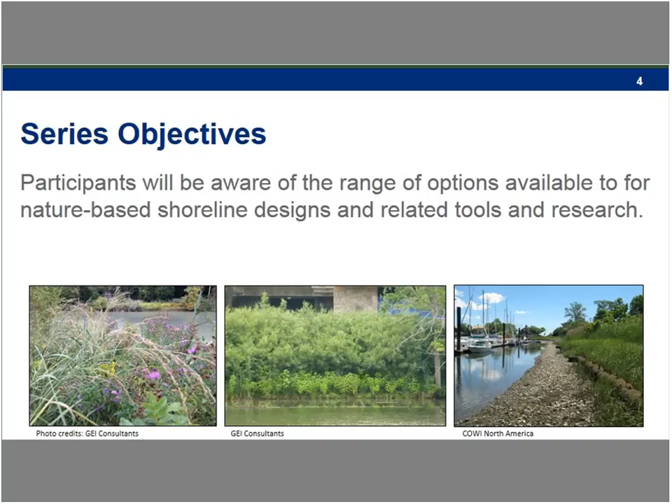So I just want to talk a bit about the series objectives. We just want to make sure that our participants are aware of the range of options available for nature-based shoreline designs, related tools, and research.

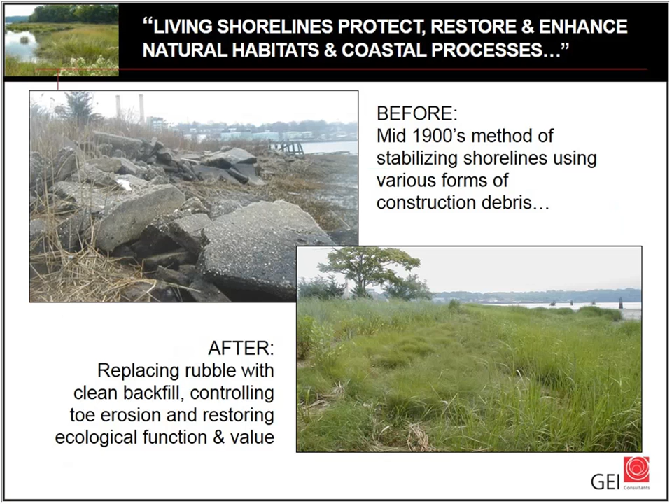As an introduction, I just wanted to share this slide that presents a living shoreline that was constructed over 10 years ago in Hempstead Harbor on the northwestern end of Long Island. Living shorelines are quite different from historic means of filling swamps and stabilizing shorelines with whatever construction debris was readily available. Essential to living shorelines is habitat protection and enhancement in a manner that still allows coastal processes to continue.

Living shorelines are inherently flexible and sustainable by nature. Well-functioning systems will widen the transition zone between open water and upland, blurring the distinct boundaries imposed by historic fill placement or development.

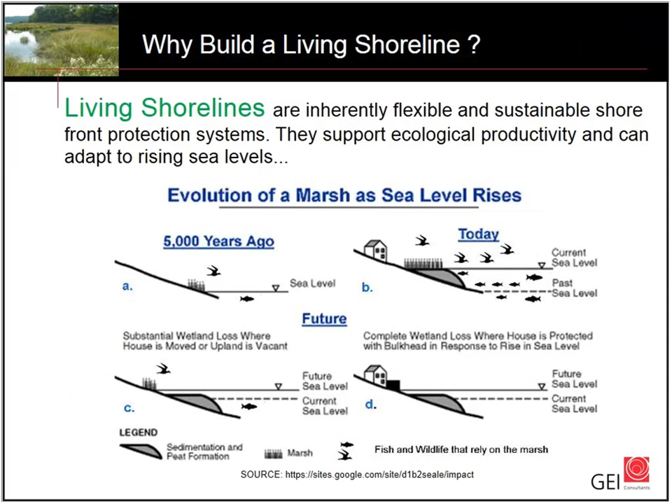Living shorelines are dynamic, complex systems that require careful planning and proper site characterization. In order to withstand the rigors of time, battering winds, wave run-up, and extreme tidal fluctuations, a collaborative design approach embracing many disciplines is highly recommended.

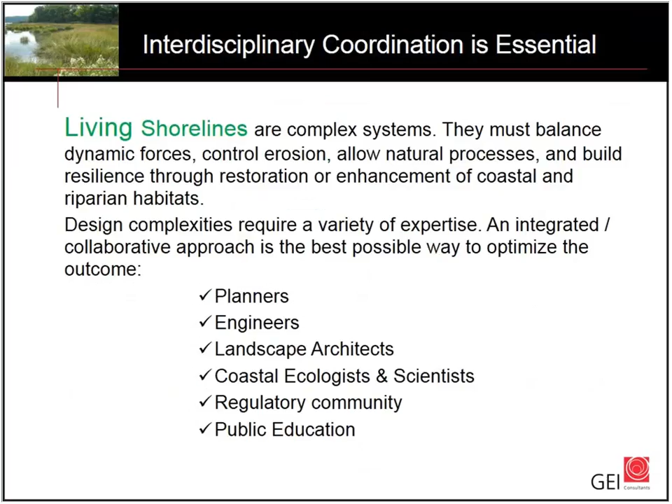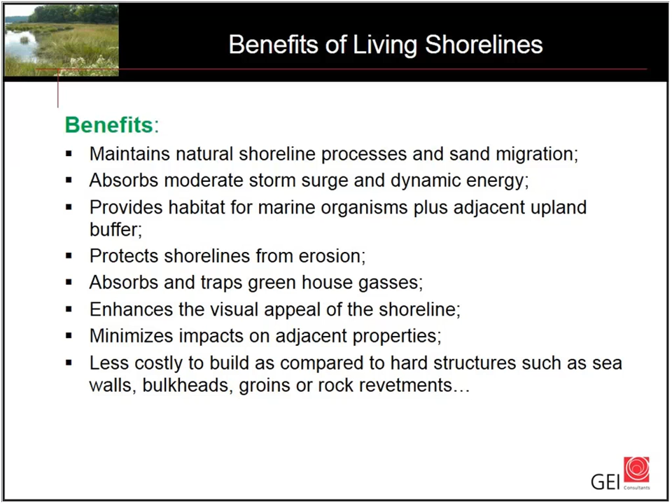There are numerous benefits that can be derived from living shorelines, some of them obvious, some of them less intuitive. A very appealing benefit is their cost effectiveness and ease of installation. Mind you, living shorelines are not systems that can be built and forgotten or walked away from. They require long-term care and monitoring, just like you would with any living organism.

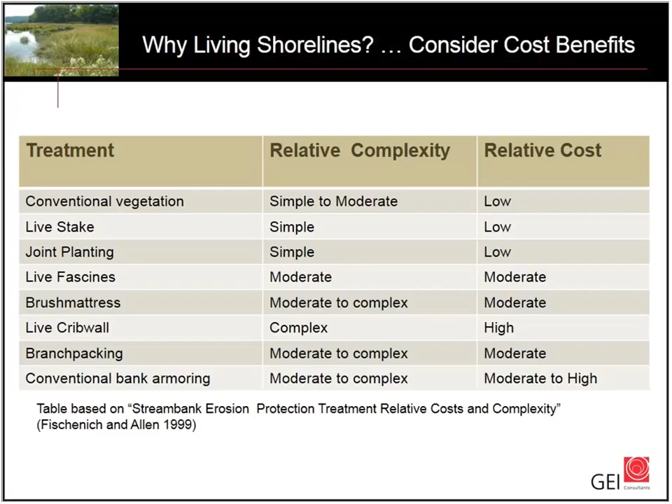What I presented here, I don't have exact dollar figures to share because those will vary across the region based on the availability of components. But I can share with you the fact that raw material costs are much more affordable than what you typically find associated with structural alternatives such as timber or steel bulkheads or concrete seawalls.

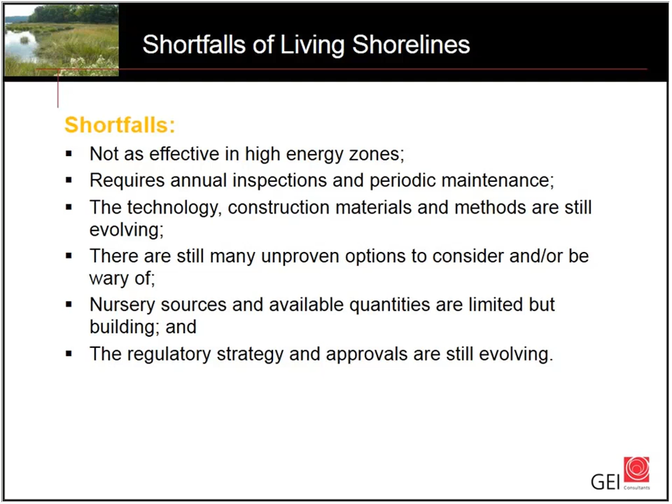I also would like to warn you, besides the benefits of living shorelines, there are some shortfalls. Living shorelines are not a panacea for every eroding shorefront area. They're best suited for low to medium energy shorelines, and we'll be discussing that in a little while. Through years of trials and errors, I've selected very basic fundamental design considerations, which I'll go through in the following series of slides.

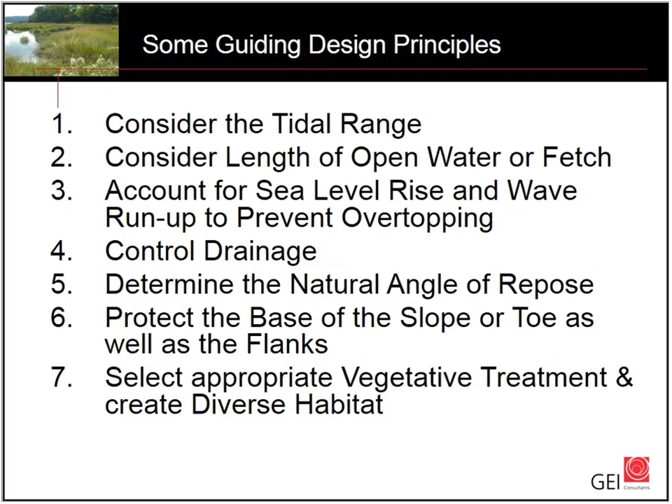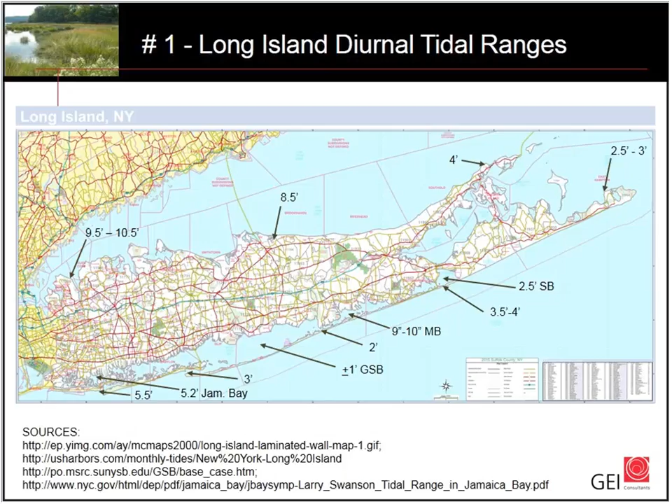First and foremost, location, location, location. It's the first critical piece of information you need to consider in design. Tidal ranges vary greatly across Long Island, from 9 to 10 feet on the western portion to 2 to 3 feet along the eastern portion of Long Island. And within the South Shore estuaries and bays, the fluctuations are moderated. These ranges are very important because they dictate the type and width of coastal planting zones you're going to be designing.

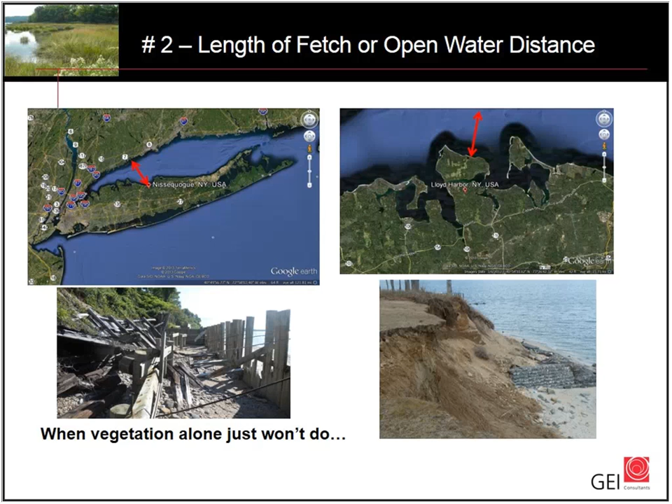Second piece of critical information is the distance of uninterrupted water, or fetch. More exposed headlands are subject to higher wind and wave energies than irregular coves and smaller embayments. You can see in the lower photographs what happened even for structural measures that were not properly protected for some high energy storm events.

I'm going to be using a number of terms. I just want to introduce them. That leads us to this analysis. Low energy sites are characterized by 1 to 2 foot wave heights and reduced storm surges. These are generally good potential sites to install living shorelines. As the wave energy and exposure increases, you could consider hybrid structures, which are better suited for those conditions. On extremely high energy sites, upland retreat or hard structures might be needed to stabilize shorelines that are subject to higher wave energy with waves greater than 5 feet in height.

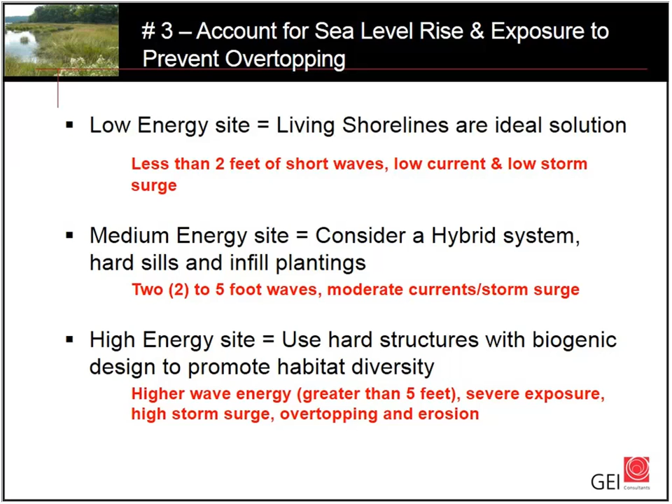Another important consideration is controlling drainage. It's critical to avoid bluff slumps or erosion scarps. With drainage, we're not only talking about intercepting surface runoff. You have to be concerned about intercepting perched water levels that might break out along the face of the bluff or the shoreline and create seepage lines.

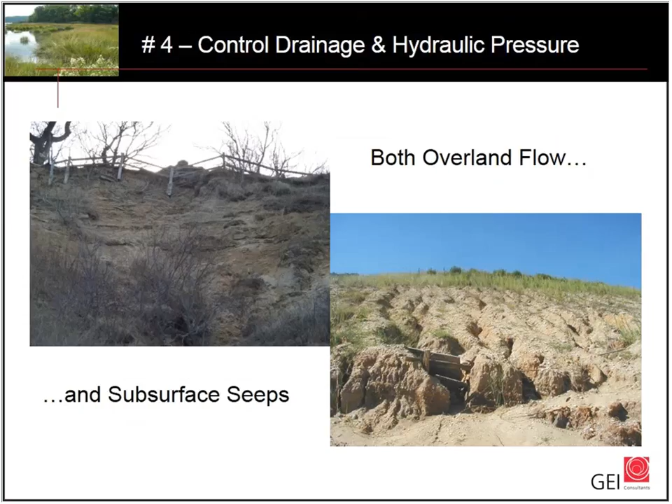Another design consideration that's often overlooked is determining the soil's natural angle of repose. If soils are left too steep, they will never become permanently stabilized with vegetation alone, and they'll require erosion control fabrics or other structural means to increase the shear strength and prevent sloughing.

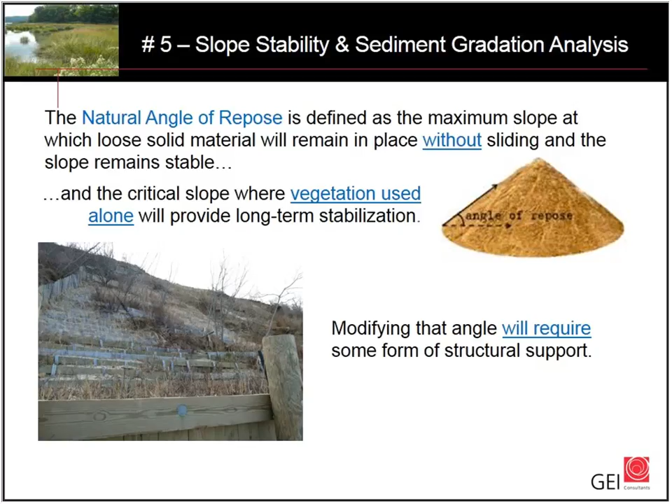Another critical design consideration for slope stability, whether it's bluffs you're dealing with, stream beds, or banks, is protection of the toe, or the base of the slope, as well as the sides of any shoreline protection treatment. Shown here are some good and bad examples of toe protection in more structural types of projects. Toe protection on living shorelines can simply be accomplished by anchoring coir logs or installing vertical batter boards or armor stone.

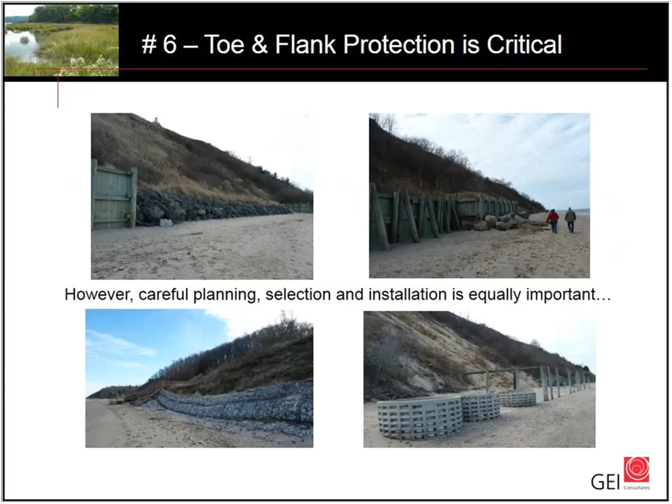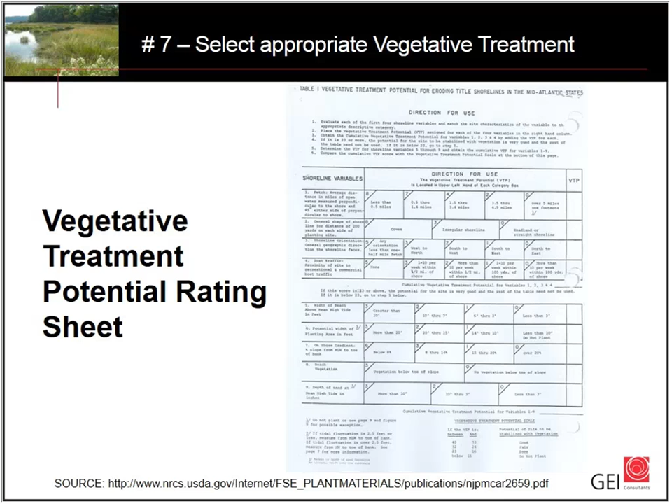Last but not least is the proper selection of appropriate vegetation for treatments. In low-energy sites on flatter gradients, plugs or seeding alone might be used to stabilize a site. On steeper slopes or higher energy sites, deeper-rooted native grasses coupled with shrubs and erosion control blankets might be needed.

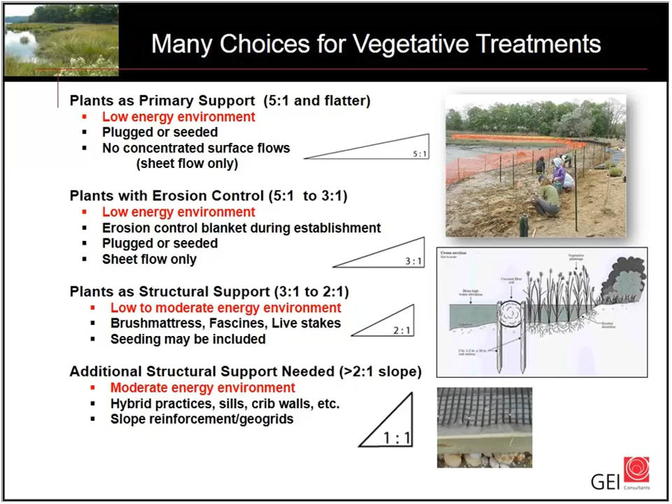Plants themselves can also provide structure when installed as bioengineered slope protection by applying root wads, fascine bundles, and live stakes, creating brush mattresses. These structural supports, the plants themselves, provide structural support until the plants start to sprout and take root into the soil.

Now I'd like to take you on a tour of 3 case studies. 2 are on the north shore of Long Island and 1 is in a south shore embayment. The first study

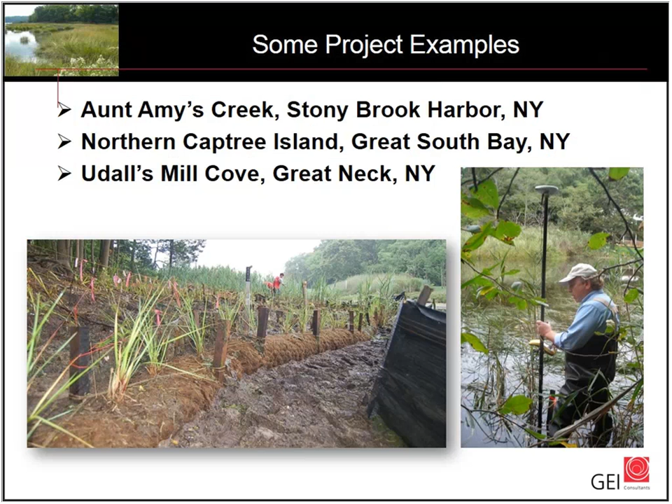is on Aunt Amy's Creek, Stony Brook Harbor. This is midway on Long Island on the North Shore, and this project involved a private residence that was perched on top of an eroding tidal creek.

Site constraints on this project included discharge from a large stormwater outfall, which created flashy stormwater flows. Also difficult was the sliding salinity wedge that would happen every time the tides would come in and out. It's a low energy, low fetch site, but it has a very high tidal range of 7 to 8 feet.

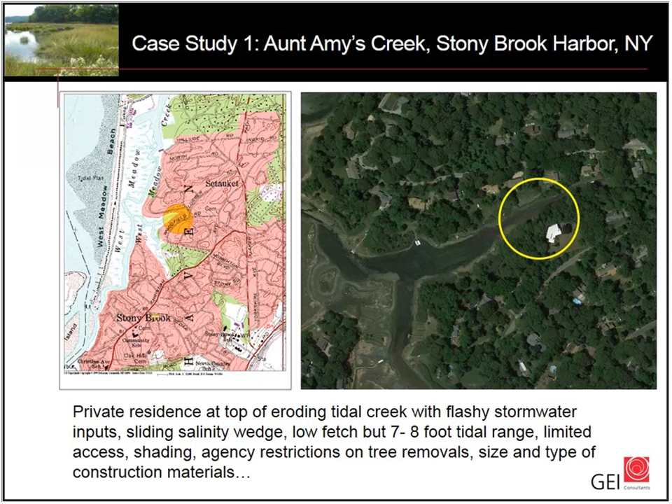At the time of our first inspection, New York State DEC had a moratorium out on bulkheads, which are already present in the creek. And the town also had a prohibition against using armor stone at the base for a revetment. So we were faced with a real quandary on how to meet all the agency restrictions and still come up with a green solution.

This slide shows the site conditions in 2007. The initial eroded condition, the banks are undercut, varying anywhere from 2.5 to 4 feet for the entire distance of the property of 400 feet. On one end of the property, the neighbor also had a floating dock, which was banging up against the toe of the slope.

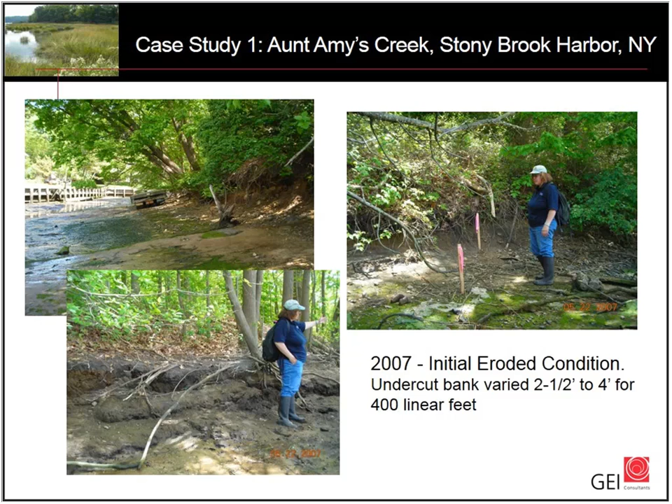Planning began in May of 2007 with our initial site reconnaissance. Following that, a site topographic survey was conducted, and we developed the plans, specifications, and all the permit application materials, which were submitted in November of 2007. Because our living shoreline components in this case were relatively unknown to the regulators and non-conventional practices that engineers were not familiar with, it resulted in a lengthy review period by the agencies.

What we ultimately designed - take a look at the lower left photograph, the lower left graphic. A live crib wall was proposed along the 2 steepest sections of the bank. And the central section, which was less steep, was proposed to be covered by a brush mattress.

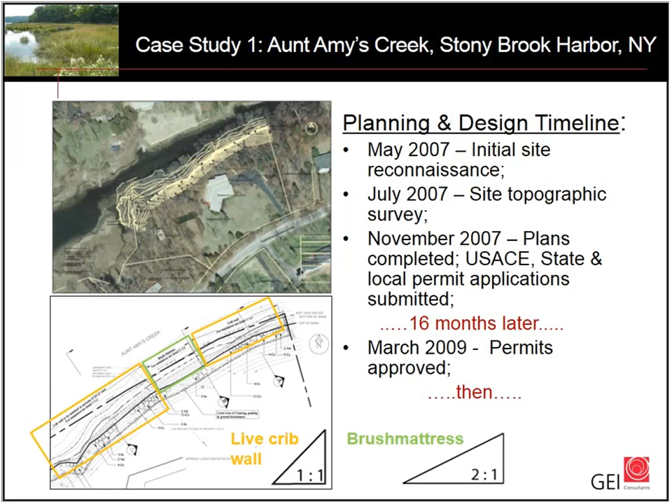Due to the extensive agency review period, the initial erosion scarp of 2 to 4 feet widened and became something larger than 5 feet in width, which exacerbated problems on the site and required additional engineering modifications to be drafted up. Mind you, this was after the permit drawings were already submitted, and as a landscape architect, my design authority only extends to structures with a height of 4 feet. Taller structures require engineering signature and stamps. So we had to pull somebody in to make those modifications to the permit drawings and then get additional approvals from the agencies.

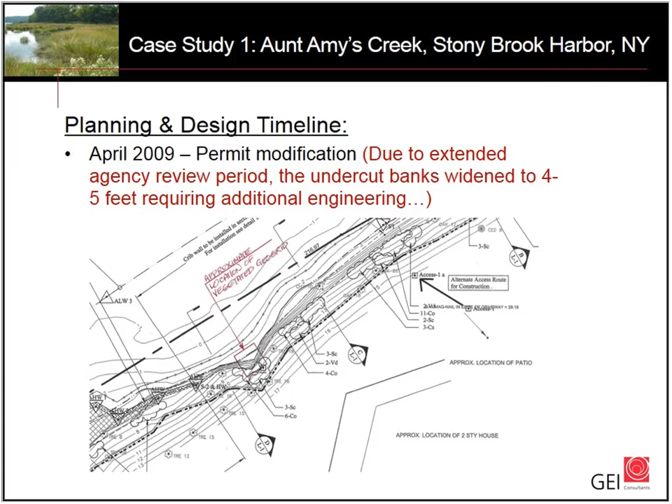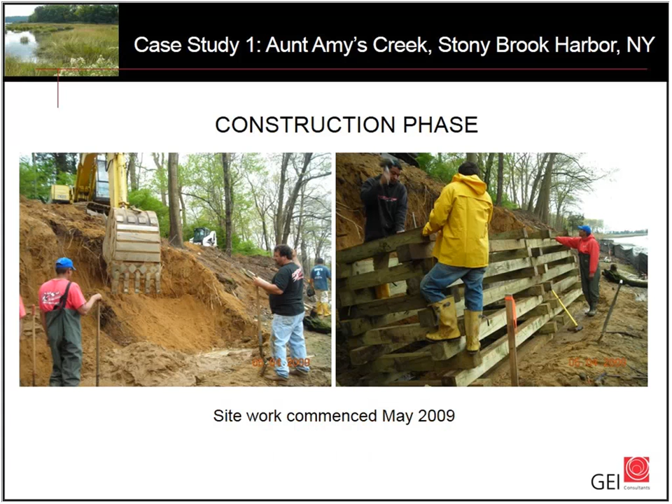Finally, we received the permits and construction began in 2009. These photographs show you the live timber crib wall, which is built basically like Lincoln Logs stacked upon each other with voids in between, and those alternating rungs are interplanted with live stakes and shrubs to hold the fabric together.

During excavation of the live crib wall, we encountered spring seeps that we didn't know about previously, which could threaten the integrity of the slope. Of course, field changes always need to be made, and we included some geogrid tiebacks and raised the stone infill so that the flows could continue through the bottom of the project and reduce hydrostatic pressure.

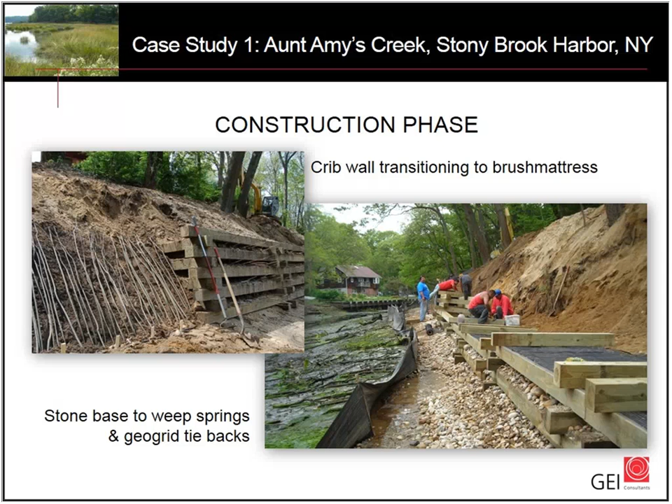As described earlier, the crib wall was installed on the steeper portions of the slope. You can see it recently completed there on the photo to the right, just below where the house sits. On the less steep sections, a brush mattress was installed on the gentle slopes. The upper left shows the cut live stakes that were used to create fascine bundles at the base of the brush mattress, and the live whips that were placed in between the rungs in the crib wall.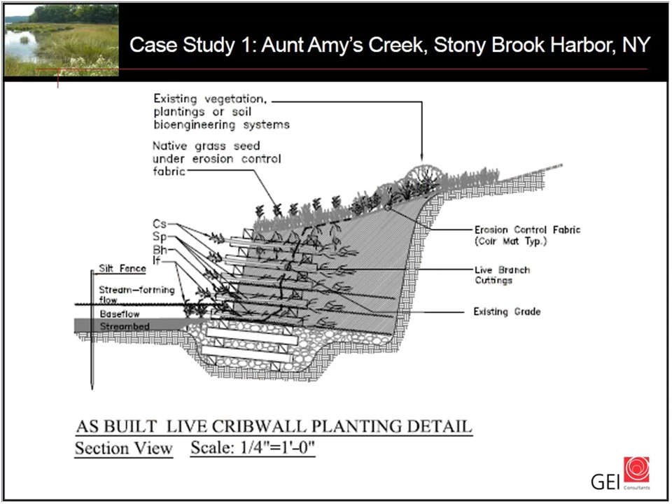What I'd like to mention in this series of slides about the brush mattress is a bioengineering technique that's been applied many times in riverine settings. We had to modify that design so that we could include salt-tolerant shrubs at the base.

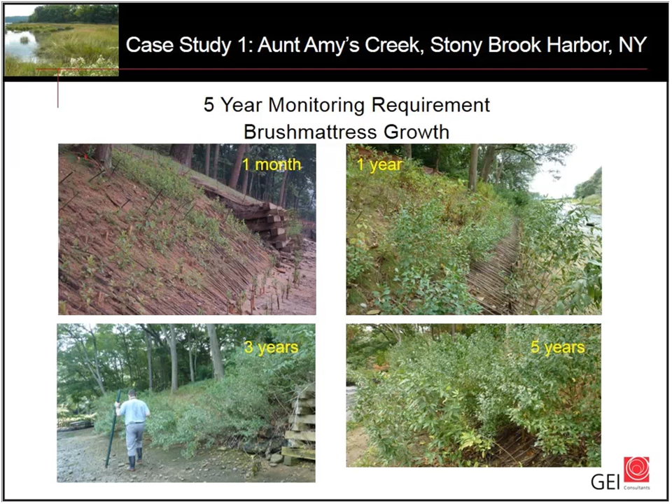The initial approach using willows and dogwoods was great when the plants just started to sprout, but over time, the willows and dogwoods in the lower part of the rungs of the live crib wall and the brush mattress did not hold up, and we had to replace those over time.

This slide also shows the vegetative growth through the crib wall over the 5-year monitoring period. You can see in the 1-year and 3-year photos that the shrubs are very well established, but by 5 years, you're starting to see openings at the bottom of the crib wall.

Those openings were treated afterwards with inserting tubeling shrubs, groundsel bush and marsh elder, that would withstand the salinity wedge that we were experiencing.

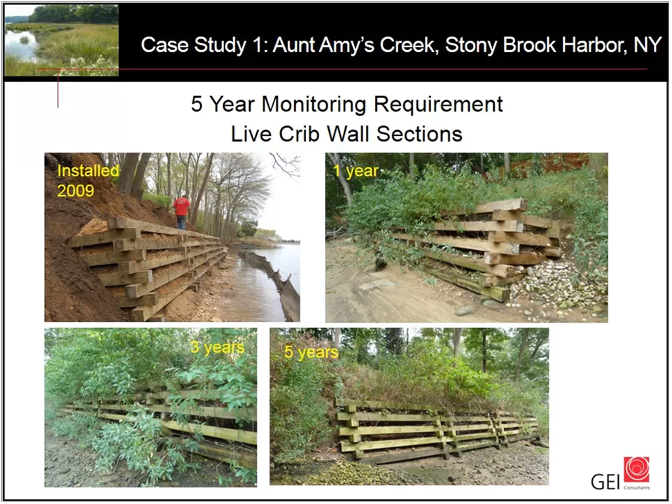I can tell you that there is no nursery supply right now that has salt shrubs on Long Island or anywhere in the Northeast of a size or length that can be used as live stakes. So that is a challenge that we're facing right now, and I've discussed it with plant materials center managers and several nurseries.

So how is this living shoreline holding up? It withstood the forces of Hurricane Sandy and several northeasters, but changes to the channel morphology and rising water levels have caused us to rethink the current needs on the site.

Stone toe protection is finally being considered after 5 years of monitoring as a viable treatment, and has gotten the green light from some of the regulatory agencies.

We're going to try to also implement a pilot coir log and ribbed mussel seeding at the western end of the crib wall where the water levels are deeper.

We're going to switch over now to a South Shore location at northern Captree Island. This is located in Great South Bay. The area is characterized by a 1 to 2 foot tidal range, but what makes things difficult is the 2 to 4 mile fetch that it's exposed to.

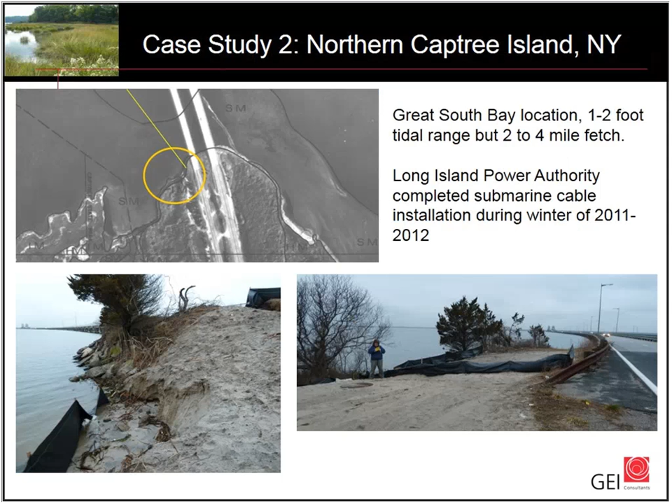The Long Island Power Authority installed a submarine cable across the bay, and we were tasked with designing the restoration on the shorefront where the cable transitioned to Captree Island to join the electrical substation further down the parkway.

Before and after the cable installation, we had to conduct some eelgrass transplanting from the submerged aquatic beds that would have been impacted. And then after the cable was in place, the area was replanted with eelgrass plugs.

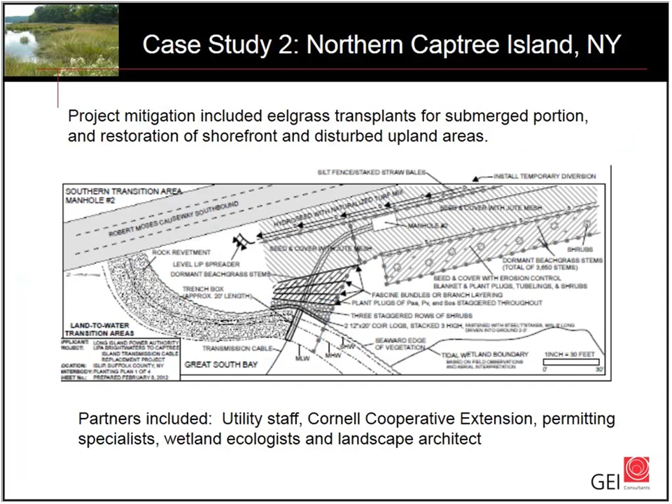The partners on this project included the utility staff, Cornell Cooperative Extension, who assisted with the submerged aquatic vegetation, permitting specialists, wetland ecologists, and a landscape architect, which underscores the need to have an interdisciplinary approach to come up with viable solutions.

Depicted here is the upland transition onto Captree Island. Constraints at the site included working within the confines of the utility's general permit.

Toe protection was limited by the depth of the buried cable, and we couldn't place any materials below mean high water based on the permit conditions.

What we wound up doing is stacking or terracing coir logs, installing plug plantings, native seeding, placed jute, and plugged dormant beach grass through that jute.

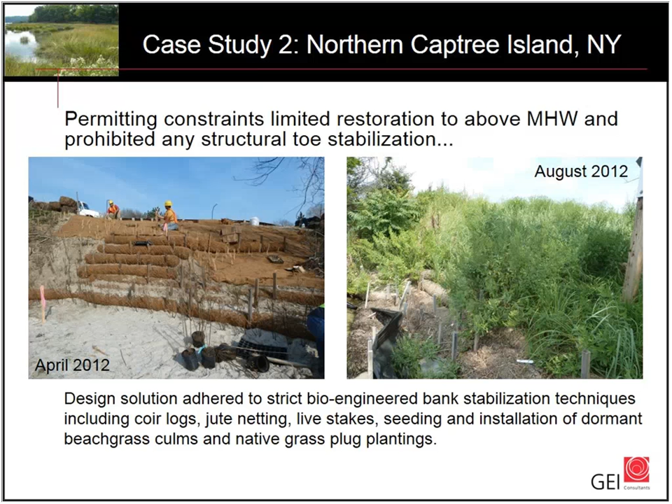Within very short time, you see in the photograph to the right, from April into August, we had very good early vegetative success. The native grasses and dormant beach grass plugs established well. Shrubs at the toe of the slope are thriving and protecting the base.

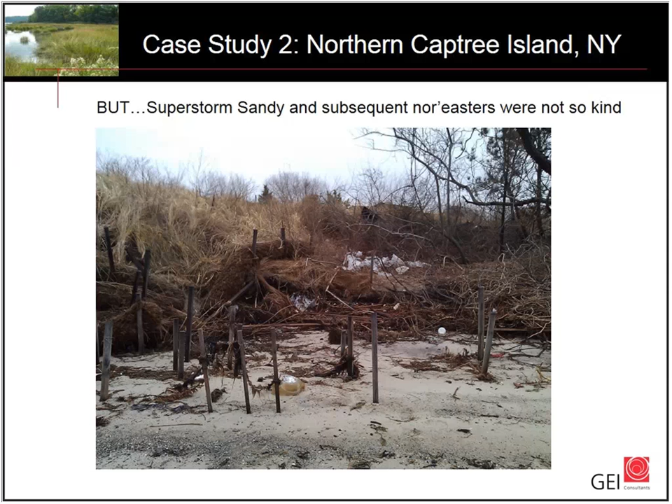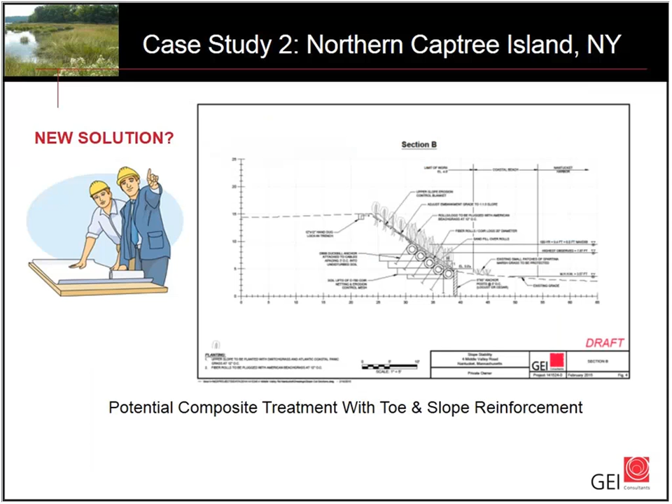What do we do now? A new solution? Possibly add more reinforcement to the stacked coir logs, tying them down using duckbill anchors and cable, and that might prevent the undermining that was seen in the previous photo.

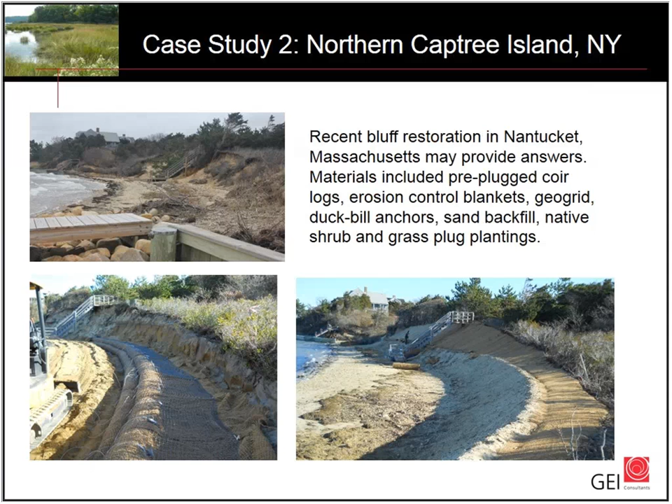That type of protection has already been installed up in Massachusetts. This tiered approach incorporating the anchors, geogrid, and native plantings appears to be doing very well, and we'll wait to see how that continues to flourish.

And the last case study is a North Shore Long Island site at Udall's Mill Pond. It's a tidally influenced coastal pond managed by Nassau County Department of Public Works.

The challenges on this project included a sliding salinity gradient, the fact that the pond is surrounded by an urbanized watershed with high sediment deliveries, and invasive species were prevalent.

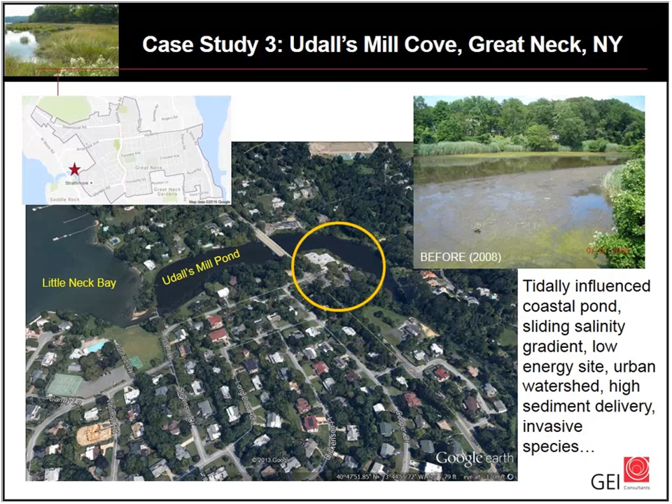Our charge was to remove the invasive species, replace them with natives, restore the habitat, and do what we can to improve water quality. In this low-energy environment, a lot can be done with plants alone.

We were able to establish a brush mattress along the bank, shown in the upper left. We replaced the common reed, the bittersweet, and black locust saplings with a mixture of buttonbush, elderberry, beach plum, bayberry, pasture rose, and native grasses and wildflowers.

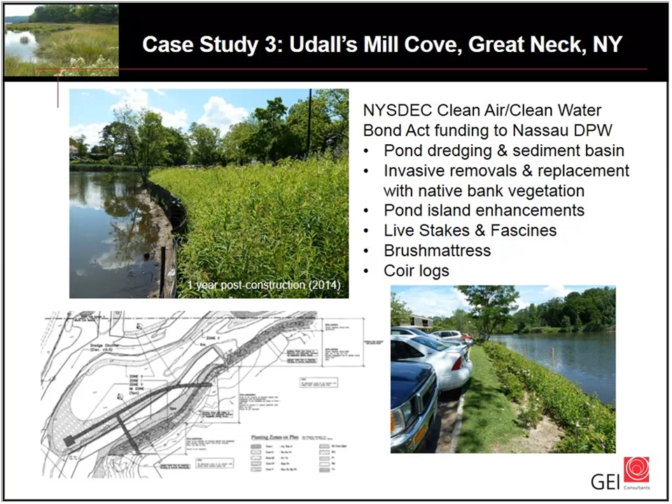These are more recent shots of the pond. The pond perimeter was also planted to salt marsh species, including smooth cordgrass, salt meadow cordgrass, various sedges, and bulrushes.

One interesting thing to note on this project: there were mud flats in the center of the pond that were purposely left open to continue to provide feeding and roosting areas for shore and wading birds. But on the edges of those islands, the peripheries were planted to stabilize the banks and also to improve water quality.

Thank you for letting me give you an overview of what we've been doing here on Long Island. I think we covered a number of different important topics: the benefits and shortfalls of living shorelines, and many of the key design considerations. Sure, there's more than seven, but I tried to highlight some of the most prominent ones, and the method to select the appropriate treatment for low, medium, or high energy shoreline areas. I'd be happy to answer any additional questions when we get to the Q&A session. Thank you.

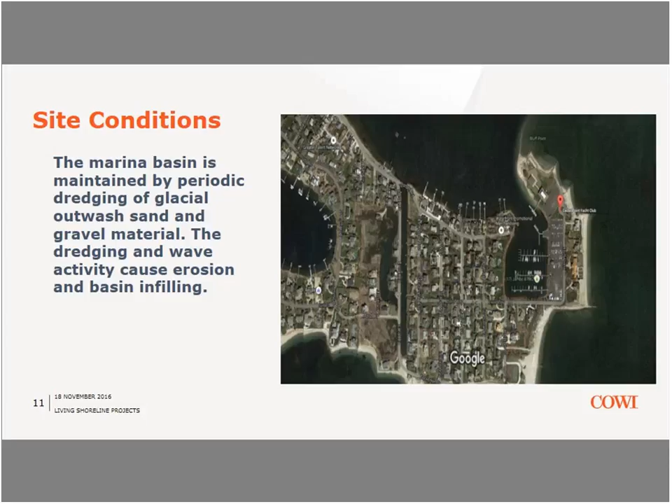Here's the basin on the western end, just to the left of my red dot. The marina basin is maintained by periodic dredging of the glacial outwash sands and gravel material, and the dredging has actually become part of their erosion problem by removing the area or material below mean low water. You create a vertical plane, a vertical cutoff, which the adjacent slope is now subject to erosion from, and you get a significant amount of deterioration of that shoreline.

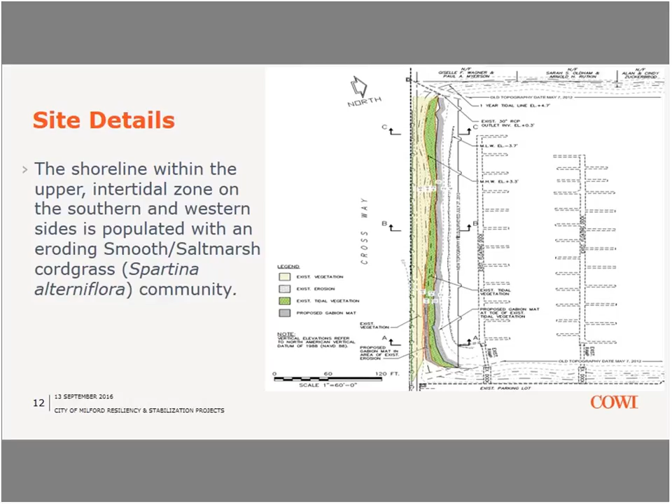Here's a plan view of the project. The green area is that intertidal salt marsh, then behind it some purple high marsh, and then into some shrubs. But as you can see, the marina for the club actually abuts that intertidal zone, so we get a stress environment from the get-go. Not only are we seeing small wave energy passing completely through the marina, but also boating activity from boaters coming and going from their slips.

A bigger view of the situation: we see this erosion above and below the salt marsh. The face of the salt marsh, the outward face, is being eroded, and there are overwashing events when storm tides are so high that they exceed the normal high tide line and erode behind the marsh. So we're destabilizing the entire shoreline.

From a biological standpoint, we've got some high marsh vegetation, but it's very minor in characteristics and presence. The intertidal marsh is a dominant species in the area. Common reedgrass, shrubs, and trees are above that. And then we see a pretty stable fiddler crab and oyster population.

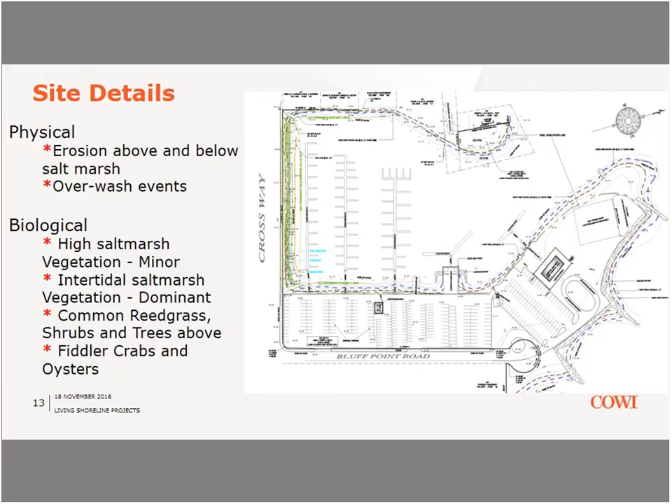Laura, I do want to say one thing that you raised as a point: if the only thing you can do in an area is plant common reedgrass, and that doesn't grow down below the high tide line, I encourage you to plant Phragmites or common reedgrass. Because of the extensive rhizome nature of the material, it becomes a very good shoreline stabilizer. It makes people crazy and the fire department nuts because it's a fire hazard, but you've gotta love it for holding the shoreline.

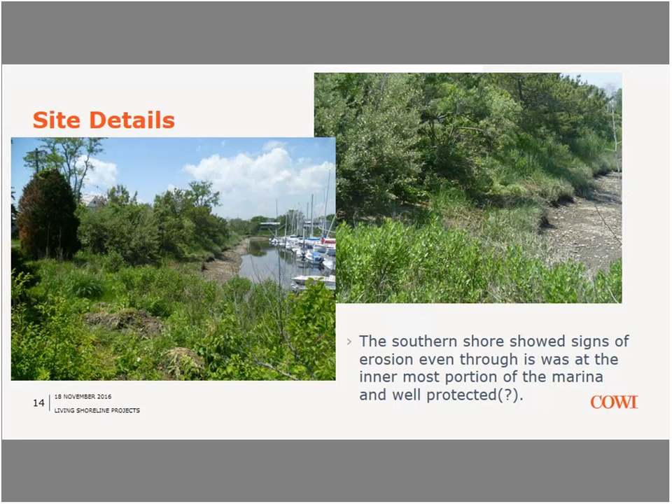So here's a look across that southern face, and as you can see, the dark areas in the left picture are the Spartina alterniflora interface. You can see them more closely in the right-hand picture, and what you see is erosion and destabilization of the marsh mat in the area.

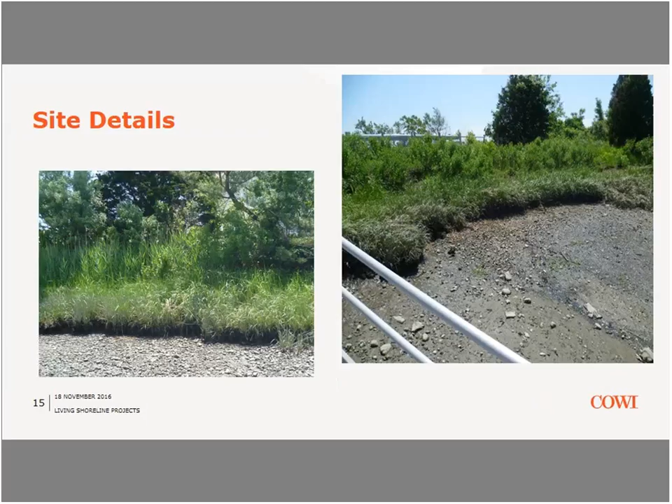A little better close-up of it, you can see that there's actually a drop-off of the marsh mat that's being deteriorated by the wave activity from boats and normal wave patterns in the area. But we did a wave study just to take a look at it, and we were looking at classically waves of about 6 inches or less in the area.

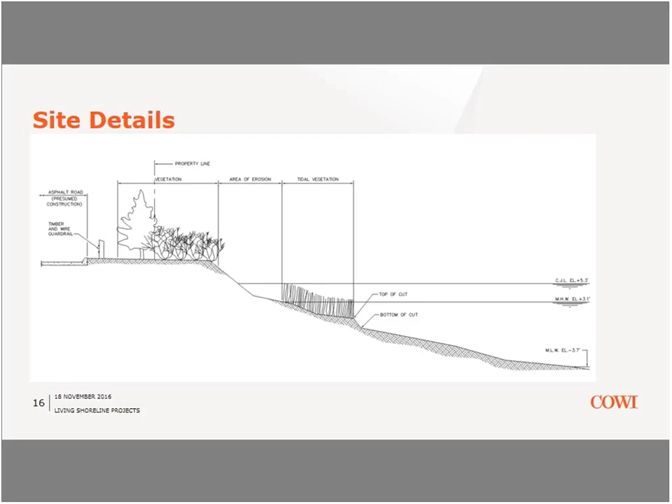Another way to look at this is in cross-section, where you can see that the high tide line is slightly below what's called the CJL line. The CJL line is the Connecticut jurisdictional line. That's where the regulatory agency within the state of Connecticut, the Connecticut DEEP, Office of Long Island Sound Programs, regulates to. It's a little different than New York State, which regulates within a set distance from mean sea level or the high tide line. So there's some game-changing and game-playing necessary to be able to move your project forward.

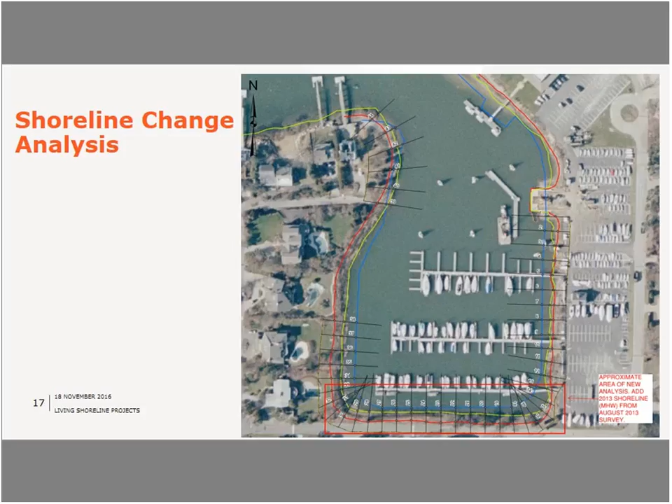In thinking about the constraints for this project then, what our client wanted was an engineered solution that was as permanent as one can get, but cost-effective, and you balance permanency with cost-effectiveness. It's also having some regulatory acceptability. Remember, from the Fed standpoint, these kinds of projects can stimulate a Clean Water Act action, which requires a lot of involvement in an individual permitting process and justifications for the selection of it.

And that's this alternative assessment and evaluation: why did you select this as the least environmentally impacting project activity that you could?

So some of the things that we were looking at when we considered the alternatives was, can we just steel sheet pile this thing and walk away? It certainly would be permanent and robust. It's a well-understood design, but it's expensive, multiple thousands of dollars per linear foot. We needed 700 feet here, and that really exceeded the club's operating budget for several decades. So they asked us to find other things.

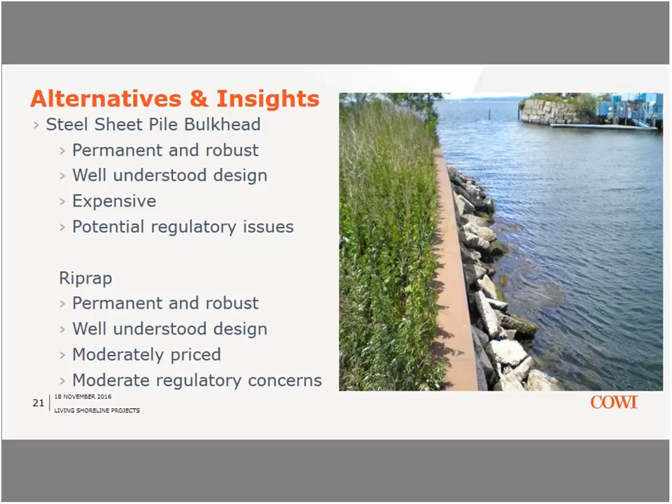Nice idea, but sometimes you get folks who just don't want to look at riprap and a bulkhead. So if you're just going to go with the riprap, that's also pretty permanent if it's correctly designed and robust enough to do it. It also is a well-understood design. It's moderately priced, about $40 a yard for the rock, $40 to $45 a yard for typical riprap rock sizes, and it has less regulatory concerns than the steel sheet bulkhead.

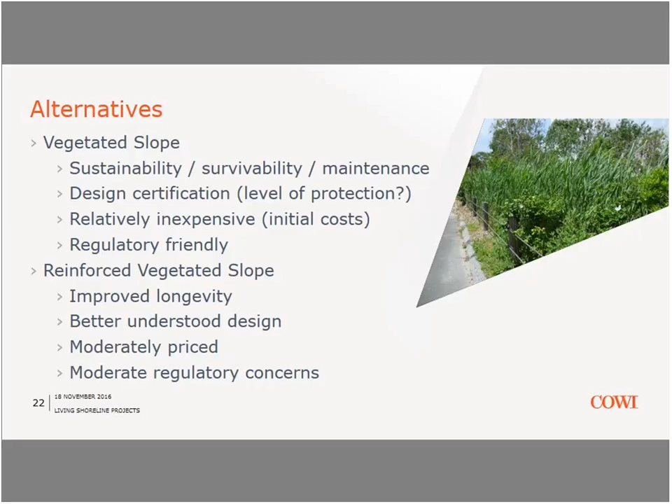Regulatory friendly: we can do a reinforced vegetative slope. You can get some improved longevity. It's better understood than some of the just vegetated slopes. It also is moderately priced, and it only raises a moderate level of concerns.

All of the rock. One of the biggest problems we have with gabion materials is that it is free rocks for everybody from age 3 to 103. Anybody who comes to the beach, or the shoreline, immediately begins to try and find a way to get my rocks out of the gabion basket and throw them into the water. So we get a fairly large amount of chaos and destruction.

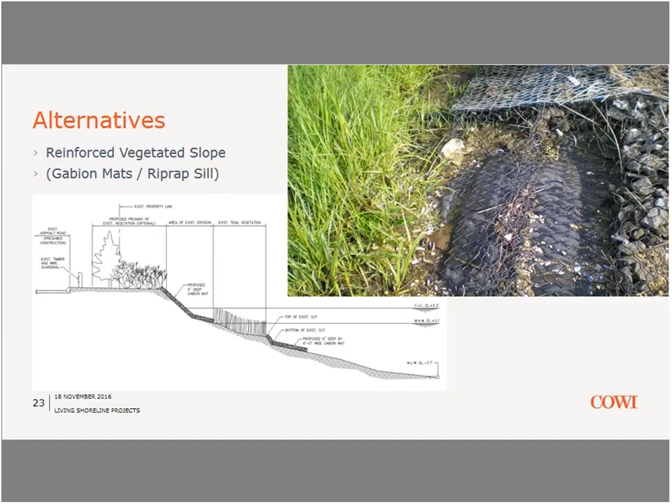When you look at the cross-section drawing here, you can see that we were proposing or considering putting that gabion mat behind the intertidal marsh and below it in front of it, and also up onto the face of the marsh to create some wave attenuation, alteration of the wave energy that was striking the face of the natural marsh mat, and also some wave breaking so that it would reduce its impact.

So we looked at reinforced vegetative slopes, gabion mats, the riprap sill. Like I said, it has a vandalism problem. It's moderately priced. And then we also considered a reinforced vegetative slope using coir mats of either jute material or coconut fiber, and you get some pretty interesting longevity out of it.

We realized that when they first came out on the market about 15 years ago, they proved relatively unsuccessful because the people who were involved in installing them and also in selling them really didn't have an appreciation for how much energy waves created. And so we would routinely see mats and coir logs rolled up across the salt marsh after the first storm.

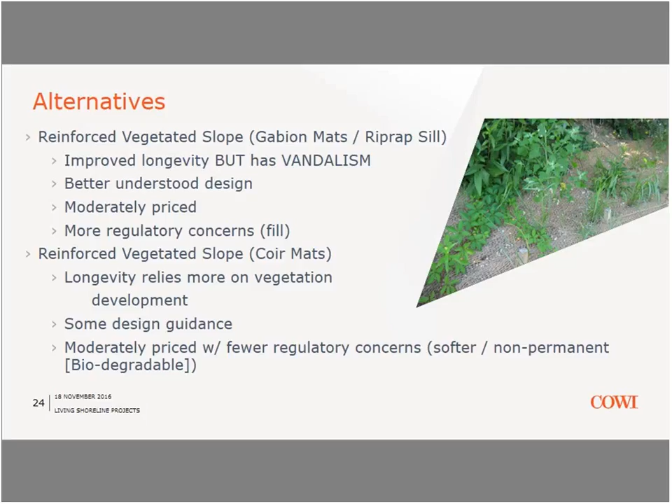Not a good thing. Since then, people have learned that you really need to put some serious retention devices, staking typically, on these things to be able to solve your migration problems. But we also get some really good regulatory response from it.

What's up here? Come on.

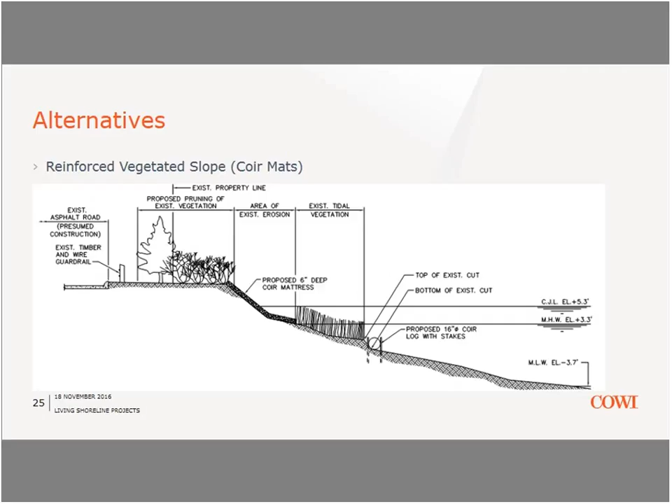Okay, so what was our design solution? Well, kind of obvious. We went with the reinforced vegetated slope, the coir mats. Why? Because we had a faster implementation process. We could deal with the erosion that was occurring on site quickly. It was cost effective. We could monitor it for effectiveness simply by walking along the shoreline, either above it or below it, and we had a pretty low wave energy environment with some infrequent overtopping.

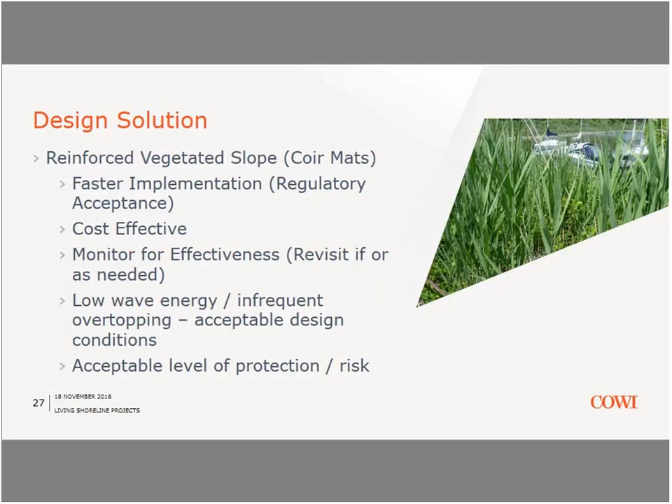Typical of storms, you can't always have them come at low tide, or at half tide, so that their energy is absorbed within that intertidal zone. They're going to come whenever they want, typically on a Friday night about 2 o'clock in the morning, or Saturday morning at 2 o'clock. Acceptable levels of protection and risk. We could say, hey, we think you're going to get a 10 or 20-year storm protection from here.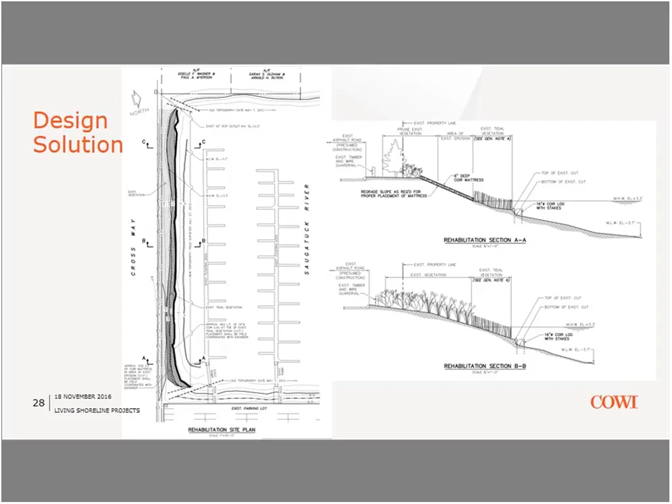And so what we looked at was, how can we do that? What we did was we placed a coir log in front of the salt marshes, as I pointed out in that prior slide, and we built a structure behind it so that the upland could be protected as well. What did installation look like? Well, installation was done in April, before the growing season had really begun, to be able to maximize the value of natural growth occurring up through them.

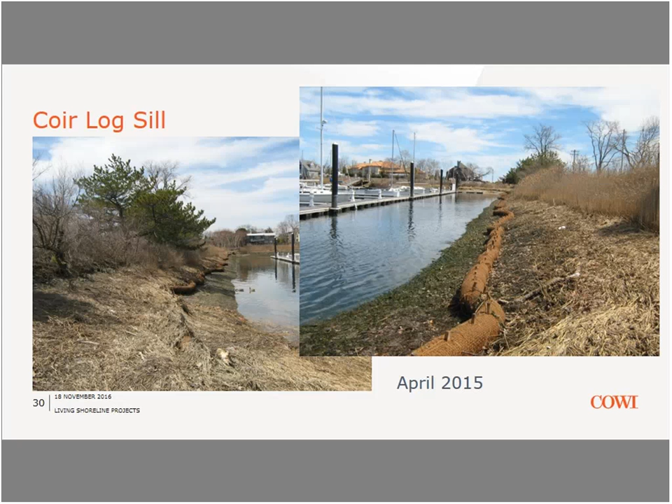Here's the coir logs in the right picture. You can see they follow the dominant erosion zones. You can see how close the boating activity is. And then in the lower left-hand corner of that picture on the right, you can see the wave that was striking the shoreline, about a cat's paw, 3 to 4 inches high, but it was enough to create an erosive environment. Here's some more pictures of what it looked like by May.

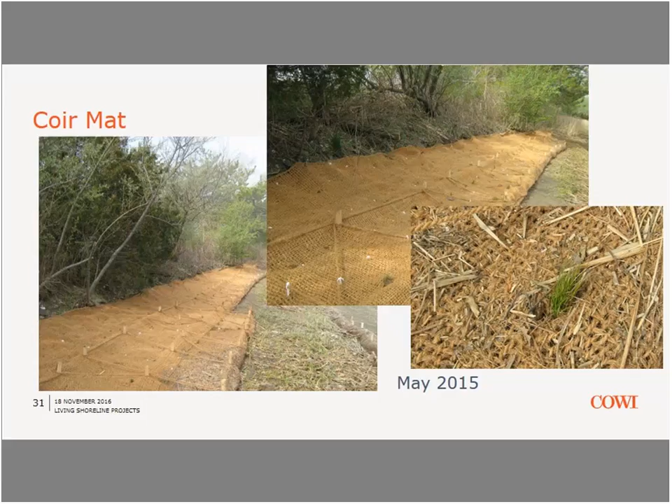And you can see in that lower right-hand picture that we're already seeing some vegetation moving up through the coir mats that we've laid. We planted nothing. There was no planting because the state of Connecticut is very reluctant to allow people to plant material because we don't know where it came from, we don't know what its life expectancy is. We would much rather have natural seeding occurring. And in these kinds of environments, when there's so much vegetation in close proximity, why not take advantage of it?

So, comments on the installation. The material was relatively available. We did a little bit of substitution because 700 feet of coir log wasn't immediately available.

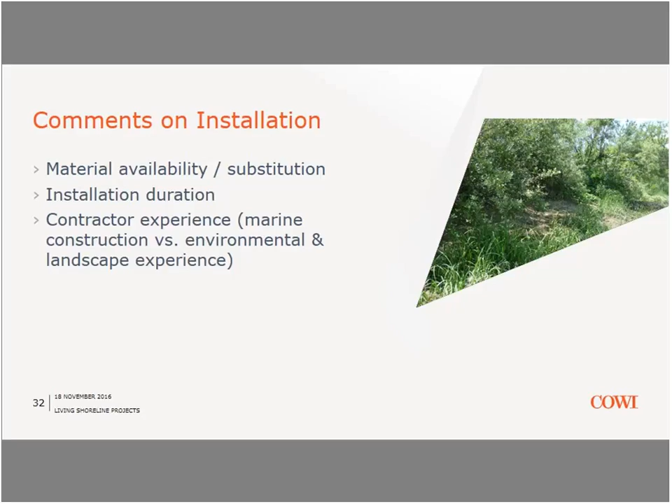The installation took a little bit longer than we thought because the contractor, although he was the low bidder, and we thought we had checked out his CV and we did due diligence on his capabilities, he really hadn't worked in this kind of an environment effectively before. So we needed to sort of hold his hand.

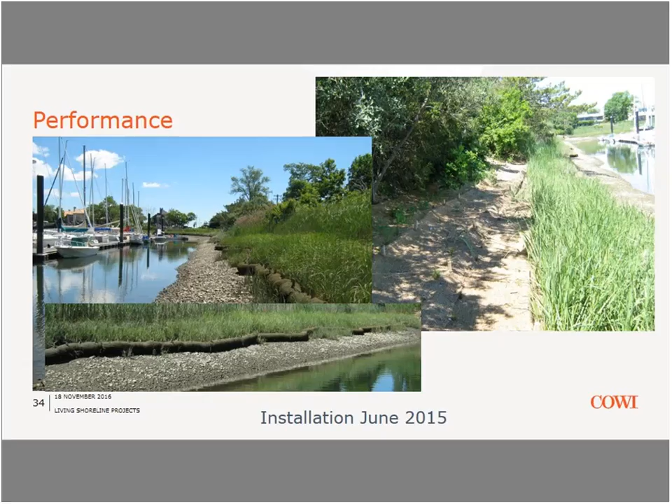So we did some performance evaluation, and we looked at, this is the installation period. As you can see, the marsh is now fully in growth phase. The upper portion of the area looks a little underutilized so far, but as time went on, here we are in early July, we can see in the middle picture some vegetation coming up, and also we can see that the high marsh vegetation is also beginning to sprout through here.

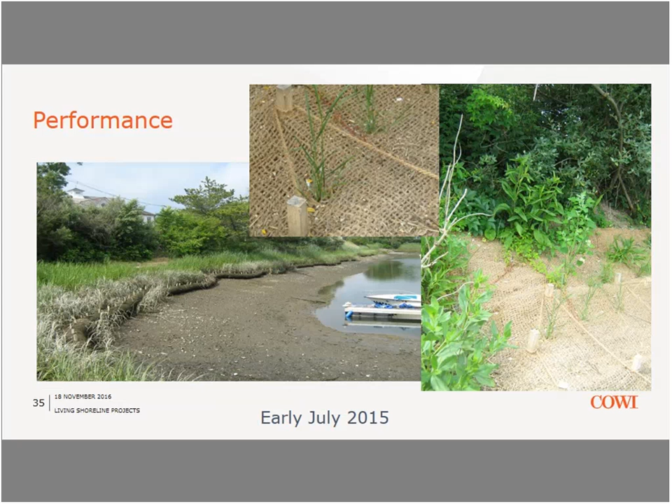And we found that the high marsh, the Iva frutescens, is a pretty good invasive species, if you will. We don't want to call it that, but it has the wherewithal to be able to do it. By late July, you can see that we're actually getting some pretty good growth. The Spartina alterniflora in the foreground on the left side is doing relatively well.

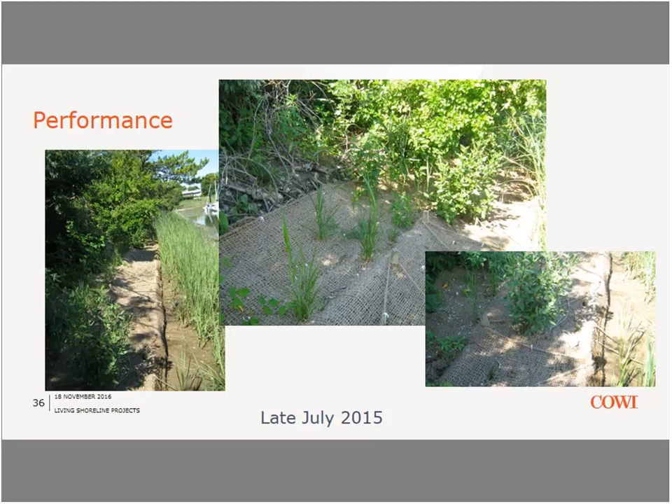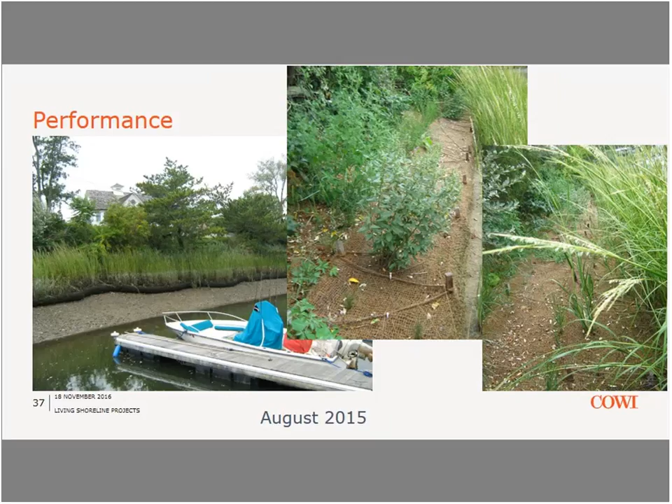We have about a 6-foot tide here, so we expect that marsh vegetation is going to grow to be about 4 feet high. But in the background, in the central and the right picture, you can see we're getting some pretty interesting vegetative growth there. And then come August, you can see that that growth has actually continued along. In that far right picture, the Spartina has already shifted to its reproductive growth. So we're getting a fairly large amount of seed in the area to move things along.

And then, so we're looking at performance evaluation. It filled in nicely during that first growing season. Remember that growing season actually stops when the seeding happens. So come August, you're pretty much seeing all of the vegetative infilling that you're going to see for the year. We didn't see any significant issues. Everybody was pretty happy. The shoreline was relatively stable.

We didn't see a whole lot of damage in the winter of 2015-2016, although we had a pretty mild winter. We had a couple of quick cold snaps, but other than that, it was a pretty easy winter. So we're going to continue to look at what happened.

So what have we learned out of all of this? Well, we've learned that we need some additional regulatory guidance, or we need to guide regulatory agencies. And that works two ways. Sometimes we walk into a regulatory meeting and there's a couple of wetland ecologists in there. But most of the time we find that there's a wildlife biologist who has never actually worked with salt marshes before. And so we have to sell it based on literature and things like that. Additional design guidance from those regulatory agencies and to those agencies is what we have gotten involved in.

There needs to be some client education. Expectation always exceeds reality in these kinds of events. And the lessons learned: involve your client early and as often as possible in the decision-making process so they have an appreciation for what's up. And then monitoring is critical to help everybody move ahead on what we might find in the future. And with that in mind, I'll take your questions.